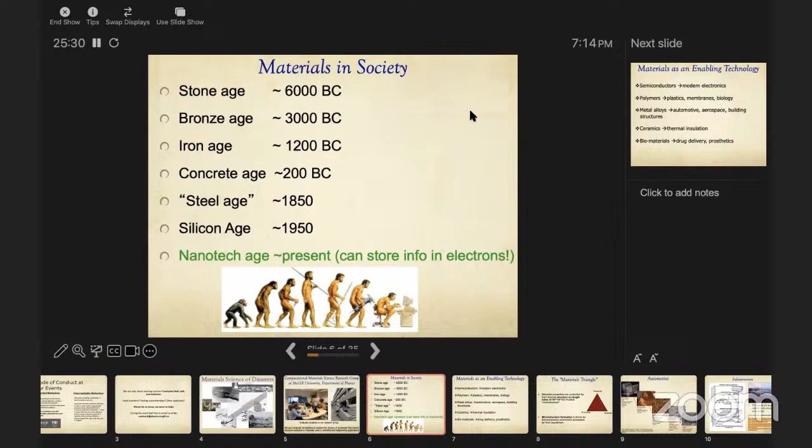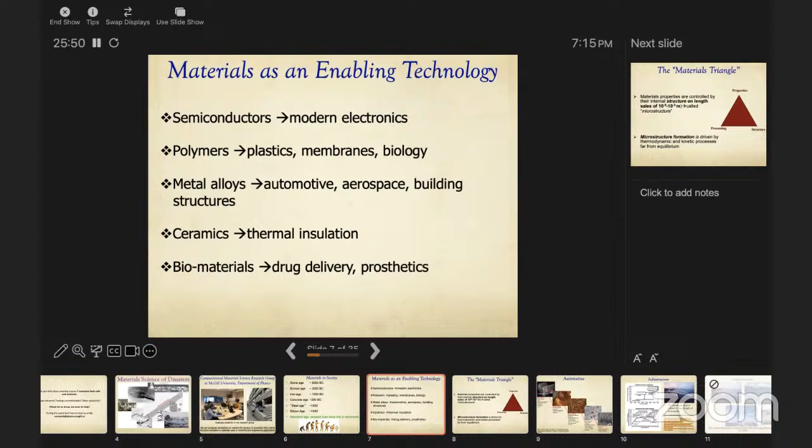So we tend to consider materials as an enabling technology: semiconductors, electronics, polymers, plastics, membranes, biology applications, metal alloys. Almost any infrastructure will evolve on the ability to make metal alloys. Ceramics, thermal insulation, biomaterials, very important for drug delivery, prosthetics, etc.

So there's something called the materials triangle that scientists and engineers are always feverishly trying to argue when they ask for grant money to do research to innovate materials. One is saying, I want certain properties to come out of a material, you name them. We know that by and large, it all is predicated on their internal microstructure. And the microstructure is made, usually spontaneously, but we'd like to design it through the process. So every material scientist and engineer can argue their research is somewhere on that triangle. I'm more here with my group.

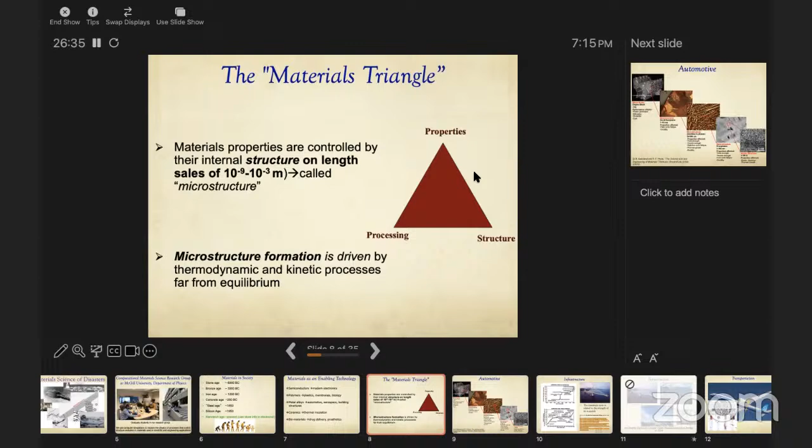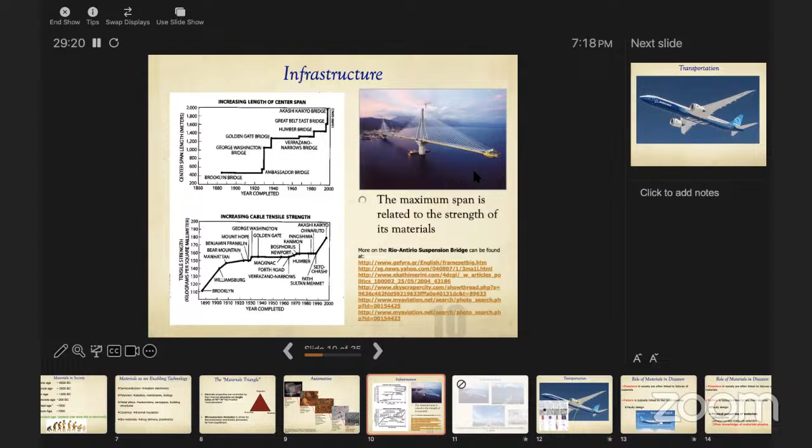Here's another interesting one from some years back in Scientific American. If you look at suspension bridges, the size of suspension bridges is part and parcel connected to the ability to create cables called eutectic cables, one of the materials used, that become stronger and stronger. And so there's a clear link between our ability to communicate via bridge and our ability to actually make stronger metals.

My favorite, aerospace. Aerospace is one of the most awesome collections of electronics, material science, aerodynamics, material science again, put together by the human race. At its core is structure. And after you take care of the programming, make the plane go this way or that way depending on the winds, that's kind of straightforward. The biggest limitation in aerospace has always been materials, especially aerospace that needs to go faster and higher.

Here's a picture, I'm not going to go into the details of that, but here's some very specialized microstructure specifically created for aerospace metals that tells the engineer looking at this what kind of strength these wing panels will have. It's a very delicate balance.

Your wing, you want it to be strong, but you don't want it to bend plastically. Imagine what happens if the wing breaks. Two ways to break. One, it can fly right off. That's bad. But way before it does that, it might just sort of bend and not come back to its taut, rigid location. What happens then? You still die. Right? The slightest permanent deformation in a wing could lead to catastrophe.

So there's a fine balance between designing alloys that are both hard, stiff, can bend a little so they don't fracture, but not bend enough that they stay permanently deformed. It's a science, it's an art all put together. And the microstructure is quintessentially the only thing that matters.

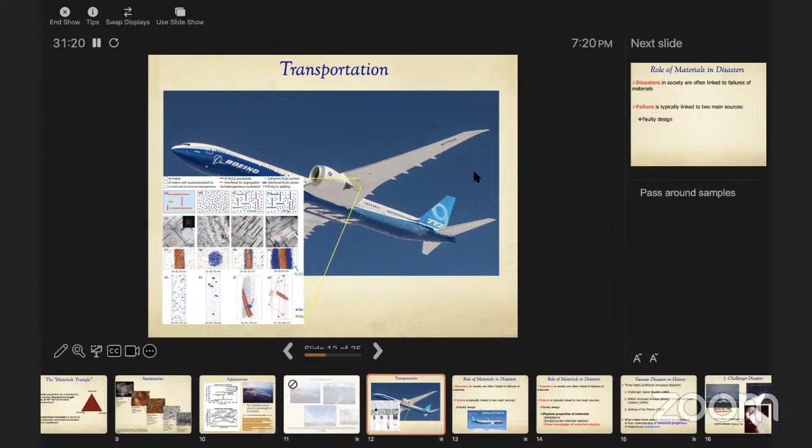This wing, by the way, on the new aircraft will bend. The 777X will allow this wing to break and sort of fold over so it can fit in airports, but then when it flies, it'll open up so it can get more aerodynamics, less drag, because there's less vortices at the end. Okay, so let's go into the talk problem.

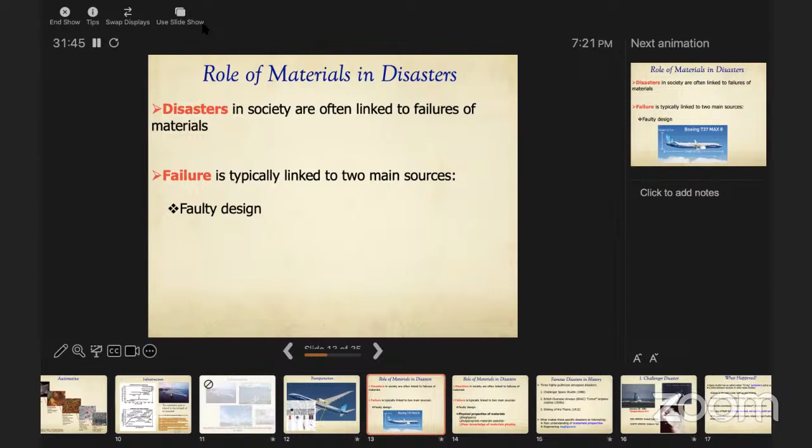The role of materials in disasters. So disasters in society are often linked to failures of materials. And failures typically linked to two sources. One is faulty design. So the example, which I won't talk about because that's kind of straightforward, is the Boeing 737 MAX that you've all heard about in the media.

I've even had the displeasure of flying one recently. I had a few drinks before I flew because, who knows? We've cut corners so many times and failed at it. At this point, who knows who to trust?

But this one was simply a matter of Boeing didn't want to redesign the plane. They had a new engine, so it was just simpler to put it on the old frame and just move the engine forward a bit. And then they told the airlines, hey, you don't have to retrain your pilots, much more efficient plane, go for it. 2 planes crashed within 2 years.

Killed everyone on board. What was happening is the repositioning of the engines on the wings was causing the plane to fight the autopilot, and both times it would crash. Apparently they fixed that now. So that's faulty design.

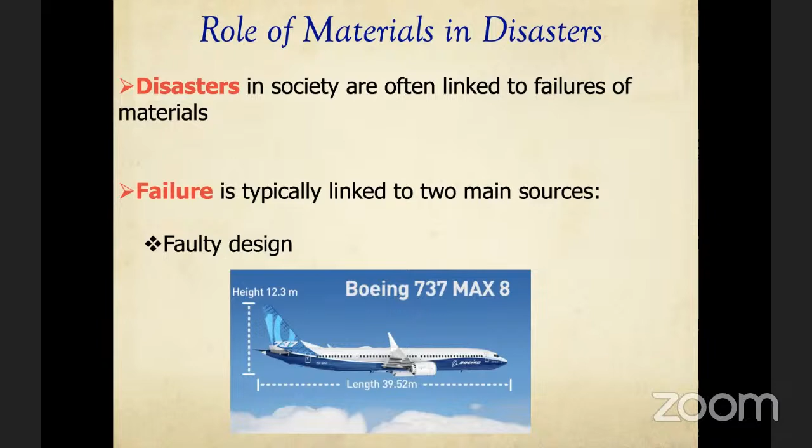Another one is the physical properties of materials. That's what we'll focus on here. Basically, negligence in terms of what materials you're using and knowing what properties you want. Inappropriate selection of what materials are needed for a specific application. And poor knowledge of the physics of how materials work.

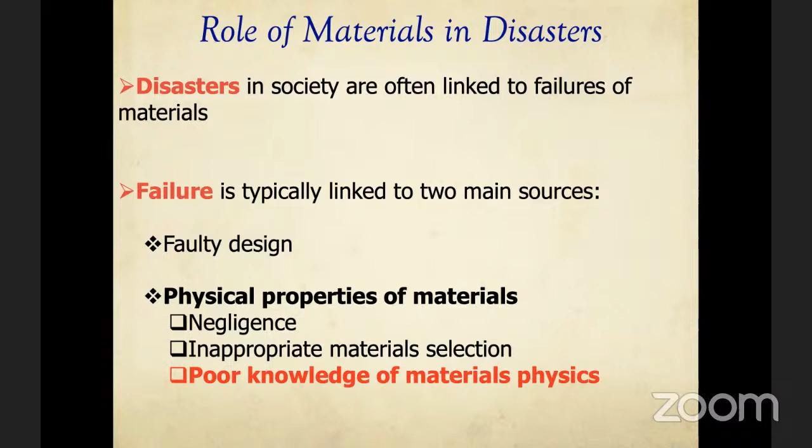And that's in red because most of the three examples I'm going to illustrate for the rest of the talk are based on the red and a little on the first one. Okay, so let's see what we're going to talk about here. There's lots to talk about. If you're a Mayday fanatic, there's a show called Mayday that talks about all the airplane disasters. They can go on for days. So I picked three because they're close to my heart historically.

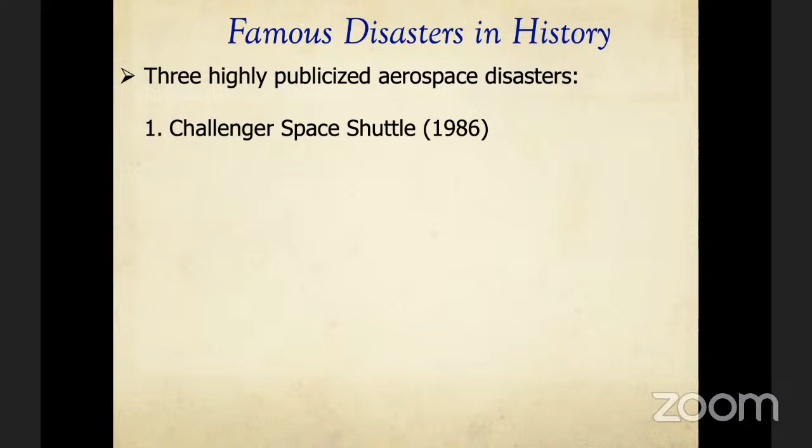One is the Space Shuttle Challenger in 1986. I remember I was in class when that Challenger blew up, and it felt like everything just stopped. It was a little like, not as extreme, but it was a little like 9/11, because the pride and joy of NASA, the space program, finally was shown to be vulnerable. And I remember all classes just stopped that day, and we were all trying to figure out, watch the news, just like we were for those who were alive. I think all of you were alive 9/11, but probably babies.

Another one that's less known in the public eye is the BOAC, or British Overseas Airways, Comet airplane crashes of the 1950s. That was truly just poor understanding of materials. And last but not least, a talk like this couldn't have happened if we didn't talk about the Titanic. Even though it's over 100 years ago that the Titanic sunk, it still continues to surprise today. As a matter of fact, the root cause of what caused it to go down was not really figured out until the 90s. People had it wrong for the largest part of the 100 years since it crashed.

So let's address each one of these. And what makes these specific disasters interesting, again, is that they all sort of hinge on not understanding properly the physics of how materials and their structure, properties and structure relate. And like I said, a little bit of engineering negligence, especially on our first example.

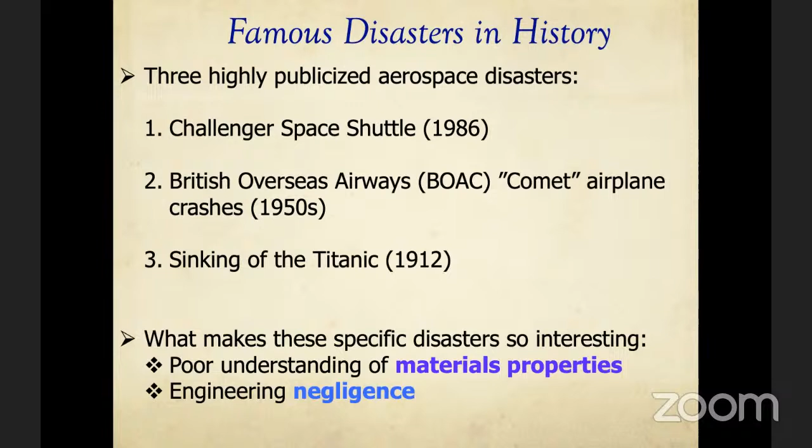So 1986, when some of the younger people in this crowd, I know, were not alive. I used to give this talk as part of an ethics talk at McMaster. Engineers have to take courses in engineering ethics, which includes diagnosing what went wrong and chain of responsibility and who had what role, etc. And I remember for the longest time I used to say, you all remember, and so the professor who taught the course said, well, you should actually stop saying, do you all remember? These people weren't born. So now I've learned my lesson. For those that were alive in '86, great. A lot of you weren't.

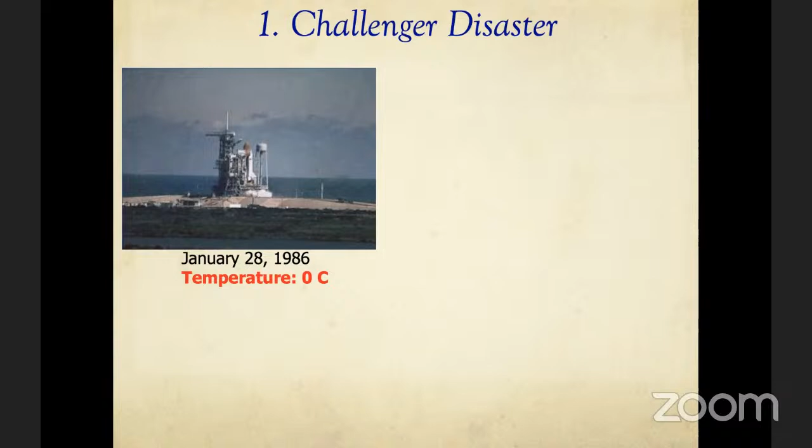So the space shuttle has so-called O-ring polymer. So this thing here, that's the orbiter. That's the thing where the astronauts sit, in white. This big tank behind it in orange, filled with hydrogen, has 2 rockets on the side, out of which hydrogen is ignited and flames come out. But it's a big long rocket, and it's not built as one continuous object. It's built in stages. And the stages lock. And the lock is sealed with something called an O-ring. It's a rubber material that's supposed to, when heated, expand to seal the joints between the interlocking tubes.

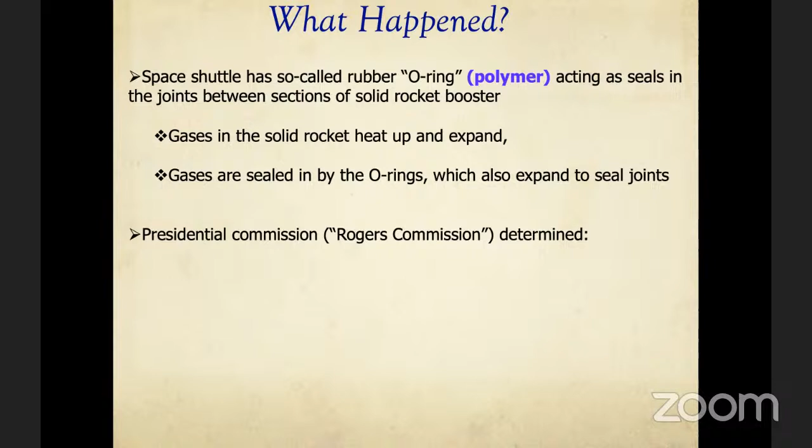And what was determined was largely by one member of that committee, who happens to be a physicist, and who happens to be the one person on that committee who didn't have any skin in the game. And he had a Nobel Prize, so he actually didn't care. Whereas, as it turned out, many of the other people were willingly or unwillingly not really seeing the truth in front of them for a variety of interests and reasons.

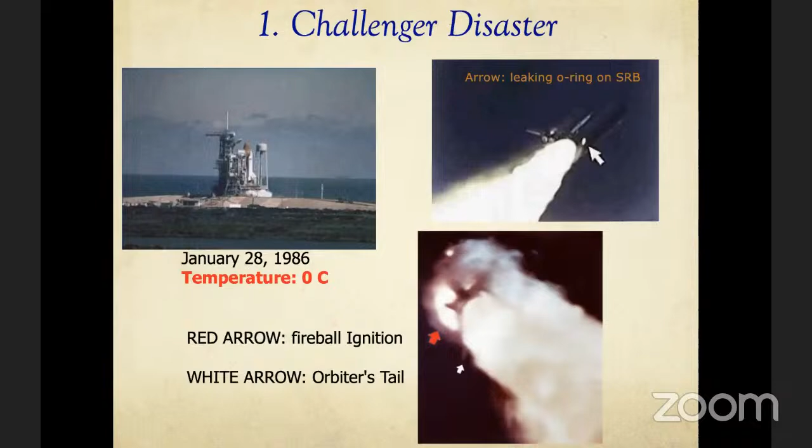And so what was determined is that on the day of the flight, this O-ring, the thing that seals, cracked. It's supposed to heat up and expand, but this thing cracked. And so the crack allowed a little fissure through which very hot, high pressure gases moved through. That's this thing right there, leading to that. Okay, so let's see how it happened. So that's what happened. The O-ring cracked, gases leaked out, kaboom.

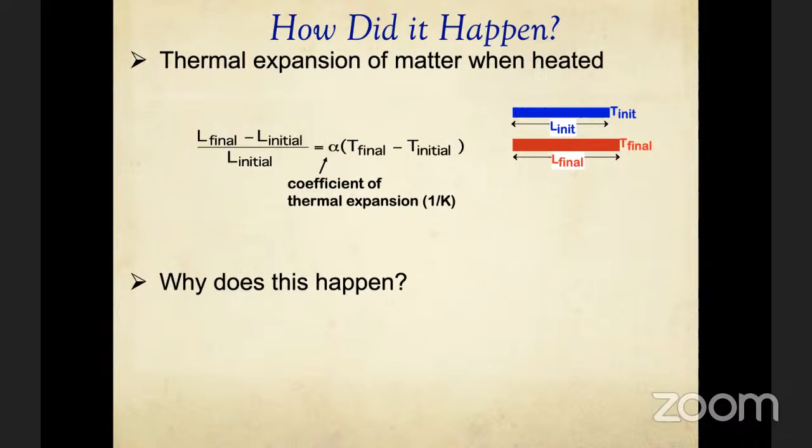So for every Kelvin of change in temperature, the material expands to the tune of alpha. Why does this happen? Let's get up close and personal in the material under a microscope. So suppose you're a little Maxwell's demon and you can actually go in the material while it's expanding and watch what its atoms are doing on average.

What you're going to find is at the low temperatures, the atoms have a certain space in between them because they're nice and orderly, because they're solid. It's a solid you're thinking about here, not a liquid. And then at the higher temperatures, the space between the atoms grows. Put that together over gazillions and gazillions of atoms, and the whole material in the real world expands.

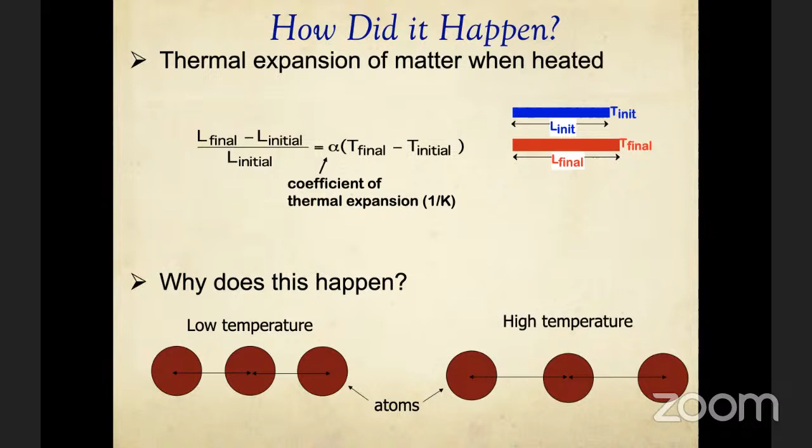And so here's a look at how things expand depending on what material they are. So the larger the number, the more things can expand. The smaller the number on the table, the less things expand when heated or cooled. I say expand, but you should read expand or contract depending on which way the temperature goes.

So you see that the polymer stuff tends to expand more. That's why they were using polymer O-rings in the connectors between the tubes through which hot gases were going to flow to power the orbiter so it can take off. Makes sense that we would use polymers.

Whereas if you go down to ceramics and glass, they have very little thermal expansion. And the glass is very brittle. You just expand it a little bit and it cracks. So you don't use that for these applications. So what gives? These polymers had a lot of thermal expansion. They should have survived the expansion. They should have done their thing.

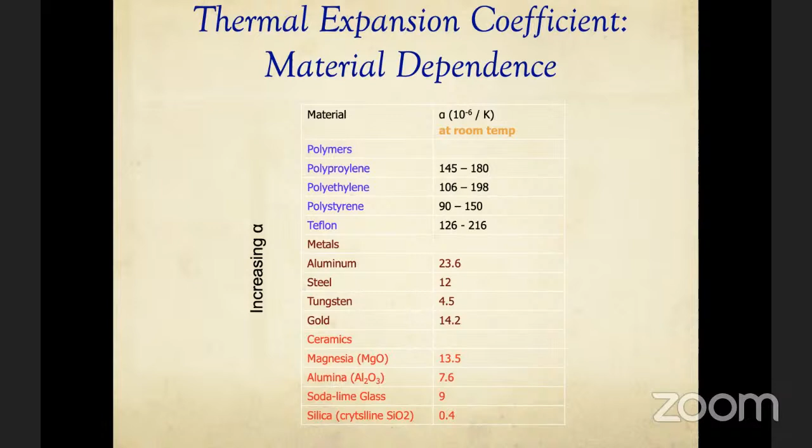But notice here it says at room temperature. What this graph doesn't tell you is that certain materials change by how much they can expand depending on how warm or how cold they are. And so here's a graphic that, if you're into stress-strain mechanics, great. If not, don't worry about it.

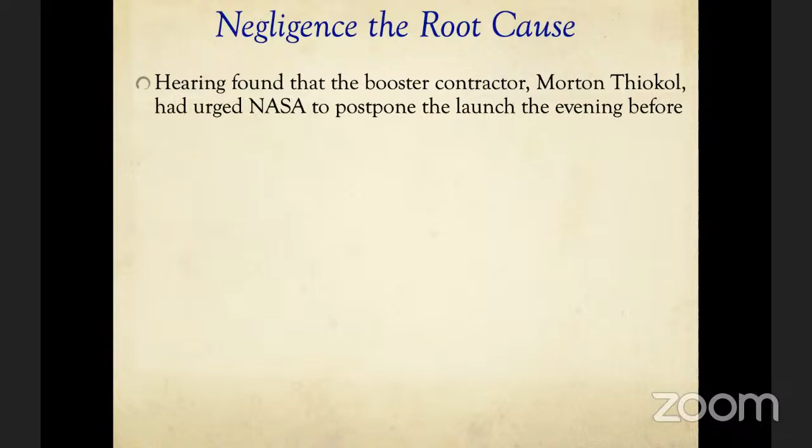Now, the interesting thing is the commission who figured out what I'm now telling you took a while, but the person who actually figured it was a fellow by the name of Richard Feynman, who somehow found himself on this committee. And in his book, Surely You're Joking, Mr. Feynman, I think it is, because it's been over 30 or maybe 40 years that I've read those books. He actually took an O-ring polymer that was at the temperature that the orbiter had been sitting at on the tarmac that day in Florida, and took a glass of water that was cool and put it in and showed that, in the reverse way, but it's the same effect, as the thing heats, cools down, it actually cracked.

So he did a little demo in front of the committee's eyes and made it unequivocal: stop looking into the skies and to the cracks in the walls, this is the physics of what happened. And it kind of broke the case wide open. I'm sure they did more follow-up then, but the main thing is he had no skin in the game, so he was able to tell the truth without fearing repercussions. So that was very interesting, not just the disaster, but also the follow-up was almost as dramatic, almost a big soap opera as the actual event itself, I remember back then.

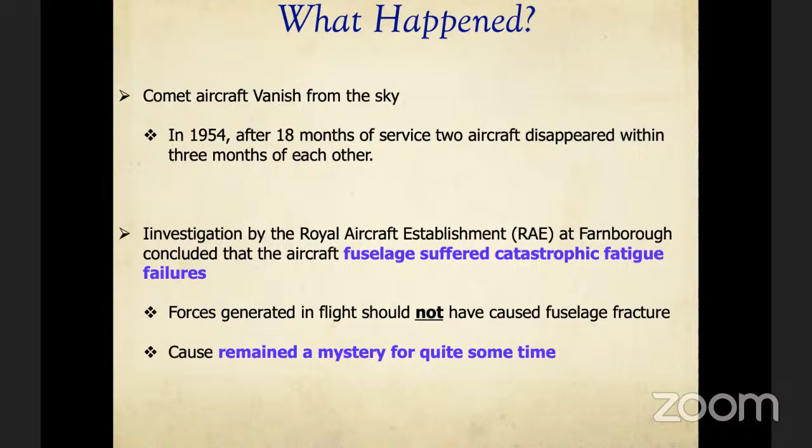So how did this happen? So again, we bring up the plane, we reconstruct it like so, and they start looking for telltale signs, the materials engineers knowing in their head the relationship between properties, performance, etc. This is a portion of the fuselage showing a window, and you see a gash here. And there's something about this picture that immediately shows a potential culprit that may have brought this plane down.

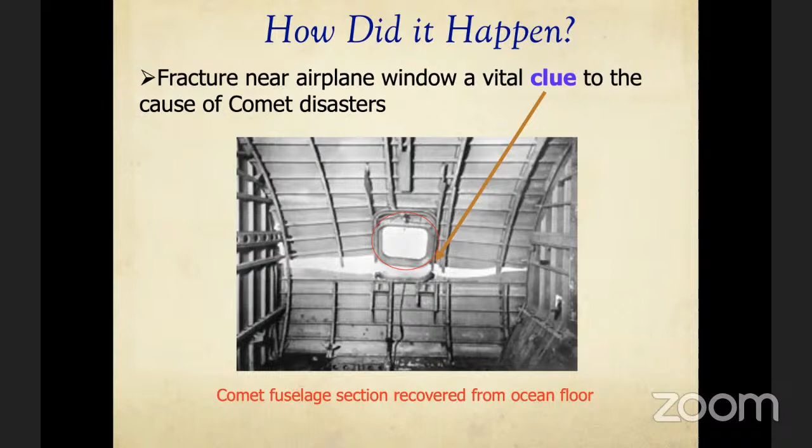So just to point to your attention, what is the root cause of what causes planes to crash? The windows on these planes were built like squares, roughly. Notice today when you fly a plane, they're ovals, and you can't really look left and right. That's not because they're trying to be annoying. There's a reason. They want to minimize how much hole is cut out of the fuselage. Back then, they were square-like. And notice the gash is somehow linked to that corner.

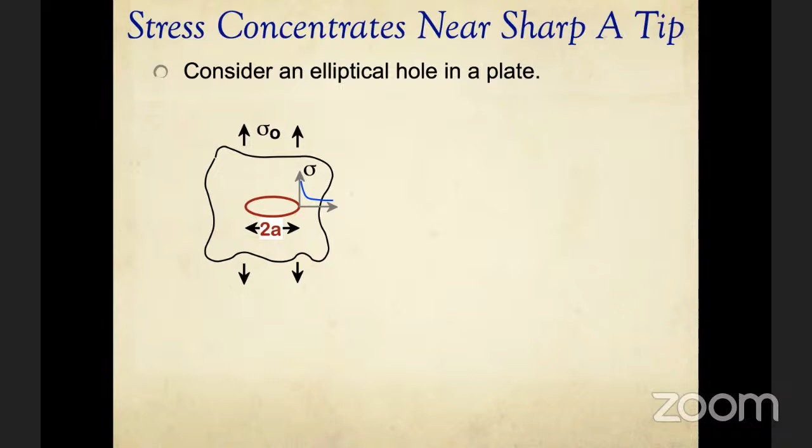So let's look a little bit at stress mechanics, very basic stuff, and let's see if I can convince you of what the root cause is without going into too much detail. So here's a piece of metal, a panel of metal, and I put a hole in it. And the hole has a length 2A. A is just a length. And I stress it. So I pull it apart, and there's a hole in it. It turns out near the corners of that hole, a huge stress is going to build up. How much of a stress will build up?

So let me zoom into this crack tip. This, imagine, is a zoom in of a little bit of that crack tip in my cartoon here. And rho t means the radius of curvature, how curvy, how sharp. So think rho small, sharp tip. Rho big, blunt tip. And here I plot the distance away from that crack tip. So I walk away from it, and the blue line shows how much stress it's feeling.

So I take a plate with a hole, I stress it. That's what sigma 0 is. I look near the crack, different distances away from it, and I ask, how much is the stress going to be? Very far away, it's just going to become the stress I'm applying on the metal. Very close to the crack tip, the stress can dramatically increase.

So, takeaway, if I have a panel of metal, and there's a little crack in it, as I pull, who's pulling? The air pressure, because all planes are pressurized. Away from the crack tip, the stress is just whatever the nominal stress is that the engineers accounted for. Near the crack tip, which the engineers didn't account for, the stress from the pull of the pressurized fuselage can jump up dramatically.

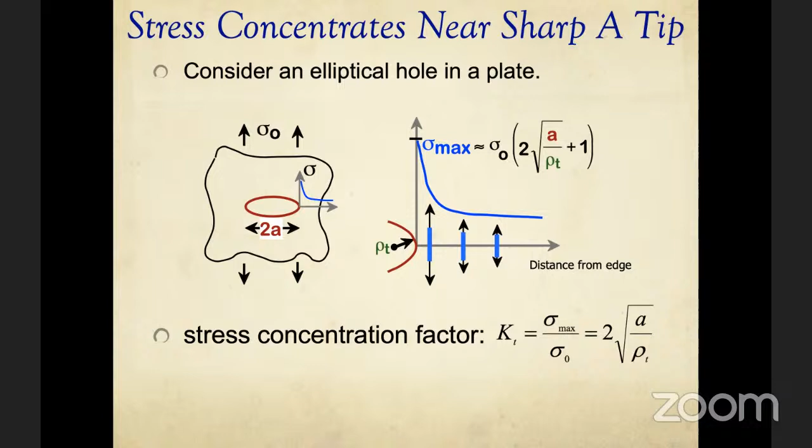Let me give you an example. You can try this at home. Take a cue card and take a hole puncher with a pair of scissors and punch in 2 cracks into your cue card. So pick an ordinary cue card and cut a little slit crack like this with your scissors. And then at the same height with your hole puncher, punch in a crack that's more blunt.

See, crack, very sharp crack. So the rho here is tiny. Same length of crack, but the rho curvature is much larger. And then take your hands here and just pull out the cue card. Which crack do you think will crack the cue card first? The one on the left or the one on the right?

Who says the one on the left? Who says the one on the right? The one on the left will go first because it's sharper. Its stress concentration factor, all other things being equal, is higher because it's a sharper tip.

Repeat the same experiment with slightly different conditions. Now take a hole puncher in both cases and make the crack have the same bluntness or radius, but make one crack longer and a crack shorter. Again, pull the cue card. How many people say the one on the left will crack first? How many people think it's the one on the right?

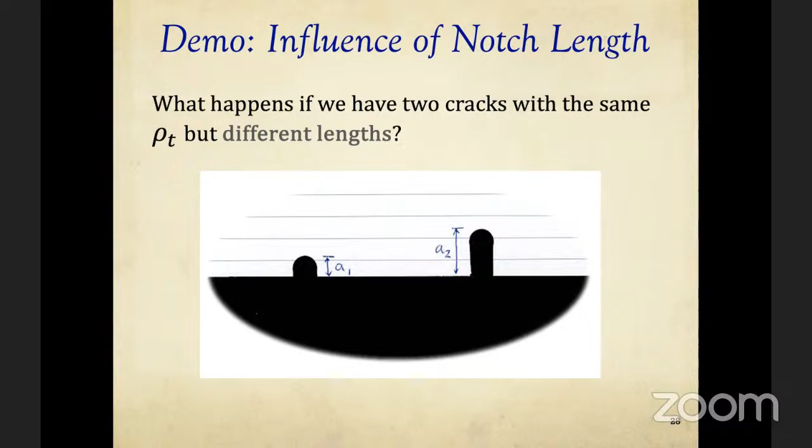Exactly. So the stress concentration factor is larger for the longer crack and larger for the sharper crack. So the two play in tandem with each other. So a long sharp crack is horrible. It really amplifies stresses much more than the nominal stress.

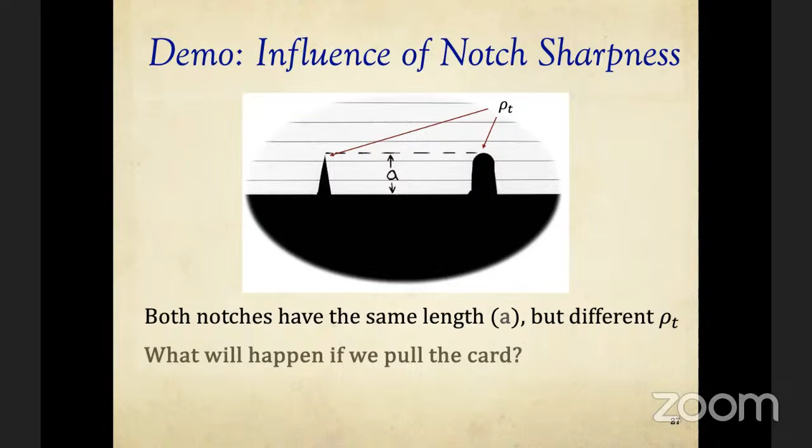So you might be thinking, okay, I'm applying so much stress, no problem. But there might be a crack nearby where at that point the stress has gone very high. How high is very high? It can become so large for any applied stress that it's not possible to sustain the stress.

In 1921, Arnold Griffith developed a criterion for when a crack of a certain length and a certain sharpness will crack. For what applied load will that crack actually open up? Called the Griffith criterion. Ironically enough, he developed the criterion in 1921, and yet the BOAC engineers most likely had not read the papers in the 1950s.

And this is not because they were negligent, this is typical. We do science today, which ends up finding itself into engineering applications 10, 15, 20, 30 years from now. Sometimes quicker, sometimes longer, depending on the climate, the politicians, the funding. So it's not like anyone did anything wrong. Chances are this Griffith criterion was just lurking in books and scientific journals, but engineers were not aware of it.

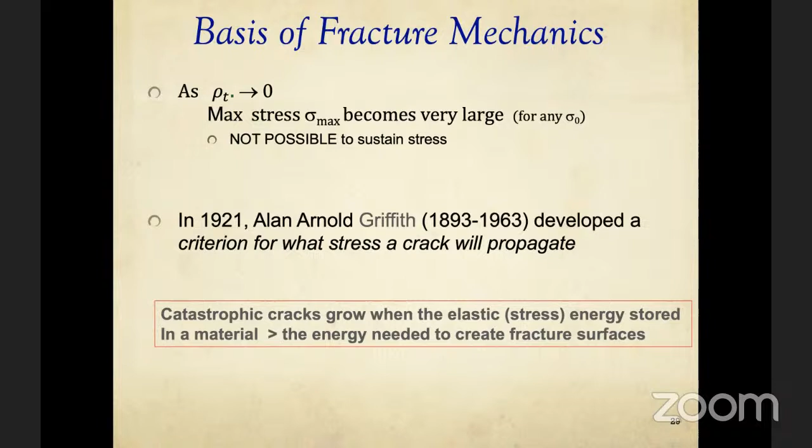It turns out free surfaces are not a good thing in nature. They cost energy. They always cost energy. The surface between the table and the air costs energy. Our skin in the air costs energy. It's what we call a positive energy surface. You never relieve energy by creating a surface. So there's some energy associated with these free surfaces.

To the tune of how long the crack is, times a certain number that's a property of the material. At the same time, the fact that you're pulling on this material that hasn't yet quite cracked open is creating a stress throughout the material, an elastic stress.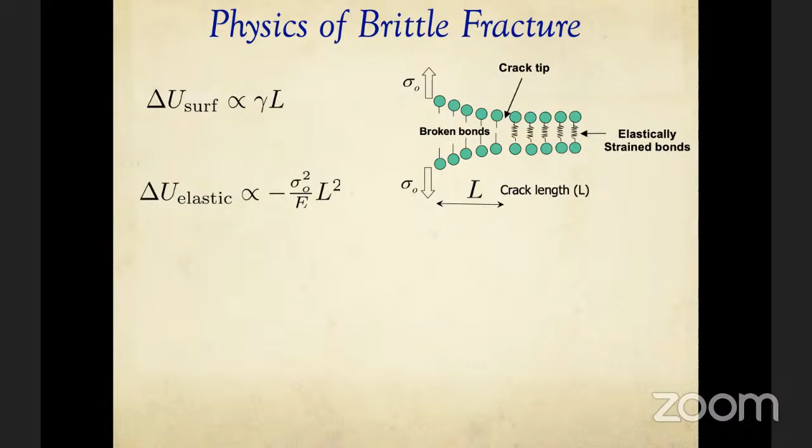And that goes like the length squared. The details of these are not important. Suffice it to say, if I stretch a material with a crack, there's a crack having two surfaces about to open. They're not liked by nature. There is a material holding onto itself elastically as you're stretching it. The two are competing with each other.

It turns out that if I plot the total energy, and another little factoid is that most systems in the world like to live in a place where they lower their total energy as much as possible. The materials don't like living with lots of energy. They like to go to a place where the total energy, simplifying a bit, is lowest.

So it turns out if I look at the crack length and the two different types of energy, I plot in blue how much stress the material is withstanding. I plot in red how much energy it's accumulating just by having open surface, the crack. Notice that there's a sweet spot below which the material has more crack energy than elastic energy. So it says, you know what? I'm going to live with this surface crack and not make it grow anymore, because that would cost me more energy. I can handle having some stress inside.

Above that certain length, the material acquires so much stress energy just by hanging on to all that stress, whereas opening up free surfaces will cost it less energy. So it says, you know what, I'm just going to fracture, relieve myself of that load you're putting on me, and just create two free surfaces. Yeah, they cost energy, but much less than all that stress I have to endure with you pulling on. Whereas when the crack is small, it says, well, you're not putting so much stress energy, so I can live with these two free surfaces that I don't like anyways. So there's a trade-off between these two scenarios, and that length became known as the Griffith length.

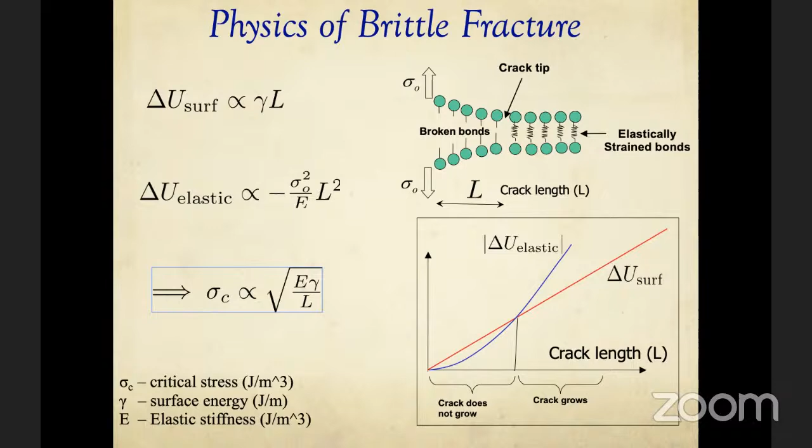So, having fun? One more story? All right, last story, the Titanic. Right? Don't we have one more?

But what happened here? So 1912, this is now over a century ago. The Titanic hit an iceberg around 11:40. It sank 2.5 hours later. Most investigators held one view up until the mid-90s, when NIST, the National Institute of Standards and Technology, for some reason, championed the case of getting material from the ocean floor, analyzing it and coming up with a revised version of what caused the Titanic to sink.

I was a postdoc at the time in Urbana-Champaign, and I was considering employment there, and I thought, well, that's pretty cool that they're actually interested in figuring out how the Titanic sunk. You figure they can do something better with taxpayer money, but that's fun too.

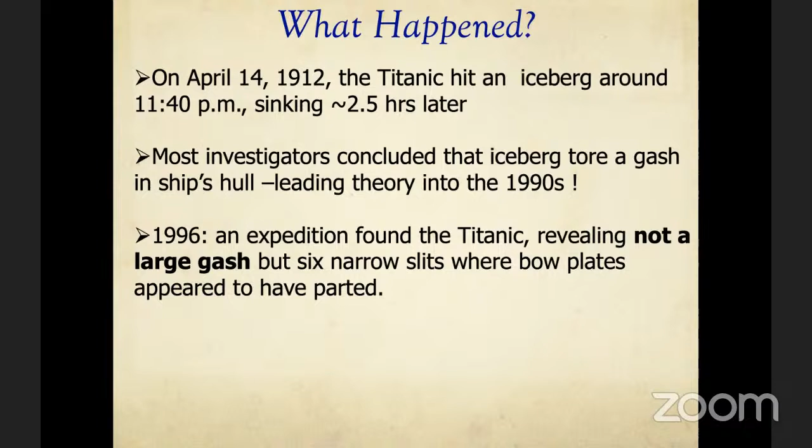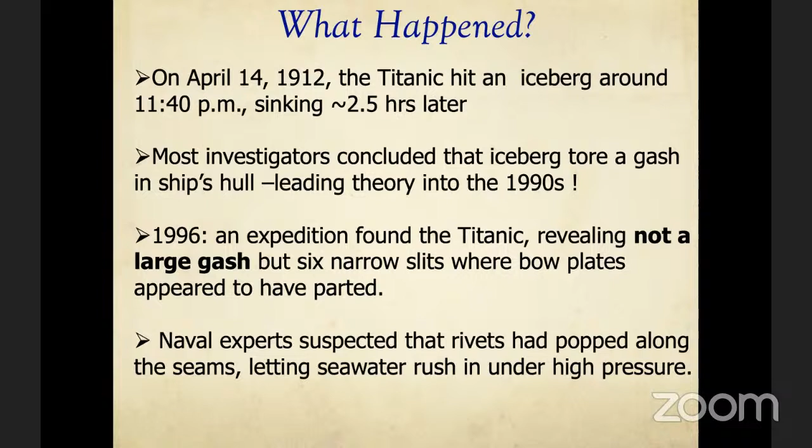So that in itself was interesting because it contradicted the theory most people had thought. They thought it just punctured a hole through, and it was supposed to be unsinkable. And we all know the unsinkable thing didn't work, because of the inside plates that were supposed to stop the water from going in, etc. And so what people then started to suspect is that the rivets that kept the plates of the hull together popped apart. So it was literally unzipping itself because the rivets snapped. But why? Again, it has to do with fracture. This time it's more subtle, but still related to what happened on the Challenger.

So some metals become very brittle at low temperatures. There's something called the brittle to ductile transition. Most metals, like mild steel or the steels we use in buildings, can withstand a large temperature range and stay quite ductile. In other words, they can take a certain load and then bend. Here you do want it to bend plastically, unlike an aircraft wing, where past a certain load you don't want it to bend permanently because then the aerodynamics gets ruined. In this case, you have steel where if you surpass that load, it's okay if it bends a little bit, even irreparably, because it's still holding together overall.

Probably every component in your car, after some time driving on Quebec roads, will never be aligned perfectly. It's probably permanently bent a millimeter out of place. But the car keeps its structural integrity. The car works. And so you want the metal to stay ductile over a range of temperatures. Other materials have very low ductility, so they're brittle. Others start their life at high temperatures being very ductile, very malleable upon loading, but do this dirty trick when they get cold and become brittle. Loss of ductility means brittleness. Think chalk. Up here, think silly putty, very gooey.

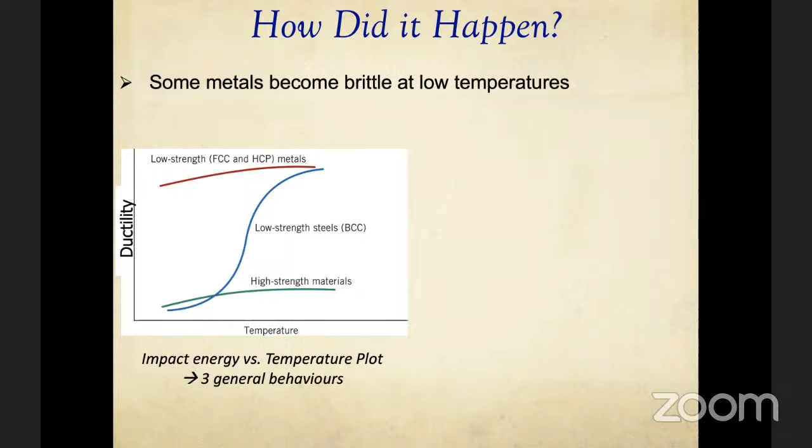And so it turns out that the rivets used to fasten the plates on the Titanic, because there was, again, a rush for production, were supposed to be made of something called pig iron. Instead, they were made of something called wrought iron. Moreover, they were wrought by hand in a rush, so they weren't mass produced; they were very heterogeneous. It was discovered later when they took samples, analyzed them, went back through the books and realized these things were not built to spec. I guess no one at the time thought about it; a rivet's a rivet, right? No one ever anticipated this would happen. As a matter of fact, based on what we know of the steel used in these rivets, they were exactly following the blue curve. The Titanic was sailing in the North Atlantic, so it got cold.

So when the iceberg hit it, the rivets were not operating at these temperatures, but they were operating cold. So they suffered a brittle fracture. So imagine replacing the rivets in your car by chalk. Then you hit a pothole, the car falls apart. Right? Kind of something like that.

So it turns out if the Titanic was sailing in the Mediterranean, chances are these rivets would have held, the bow of the ship would have bulged in, but the ship would have just sort of deflected. And looked rather unseemly, but probably at least they would have had enough time to evacuate.

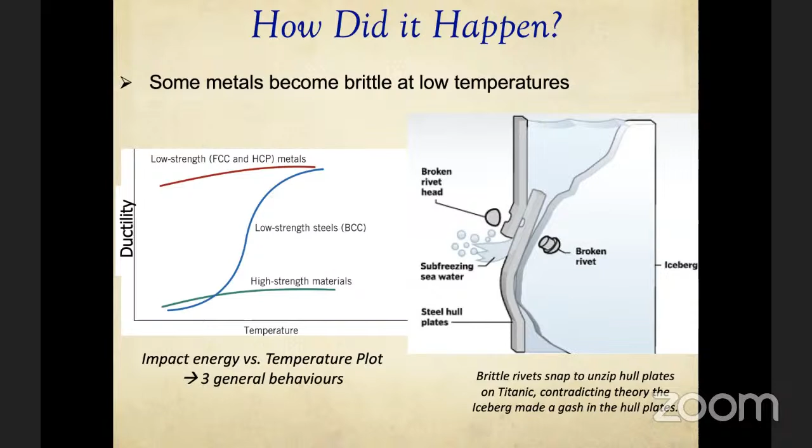But because it was sailing in the North Atlantic, the rupture was immediate and rapid, and they didn't have enough time to survive, or most of them didn't anyways. That and the stupidity meant a lot of people had to die. So that's it. That is the end of this tale.